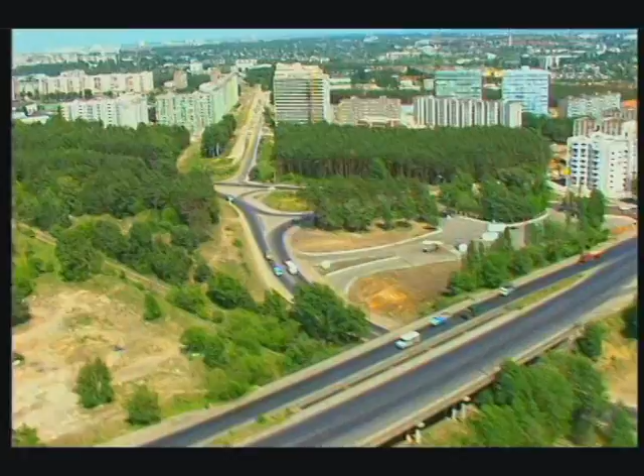Known since the epoch of Russian Tsar Peter the Great as a fortress and a cradle of the Russian Navy, the city is not only famous for its fighting past. It is fertile in scientific and educational resources, a very well-developed industry and modern infrastructure. A profitable location makes the city attractive for investors and business owners.

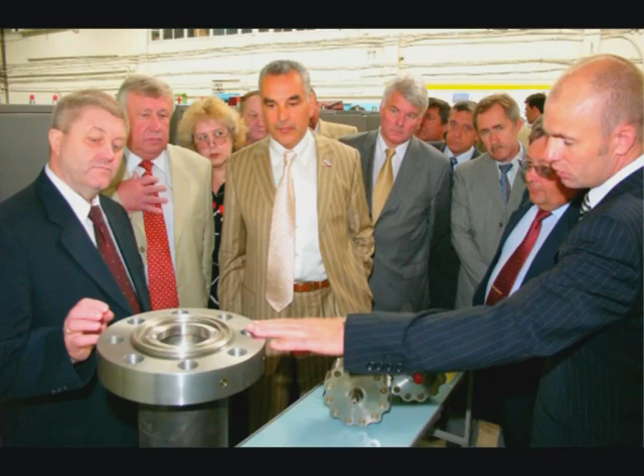A significant part of the city and the region's revenue comes from the financial and industrial company KOSMOS-NEFT-GAS. The company was founded in 1994 to meet the requirements of modern domestic origin equipment for fuel and energy enterprises. In the same year, KOSMOS-NEFT-GAS, together with Gazprom, concluded a general agreement on cooperation in the sphere of manufacturing high-performance equipment for exploration, production and transportation purposes.

In the year 2006, this arrangement was extended for another decade. The time period since the enterprise was originated is, from a historical point of view, not very long, but the company has deservedly advanced to the forefront in leadership.

During a 15-year period of working in the oil and gas market, KOSMOS-NEFT-GAS has established a reputation within the industry as being a reliable partner.

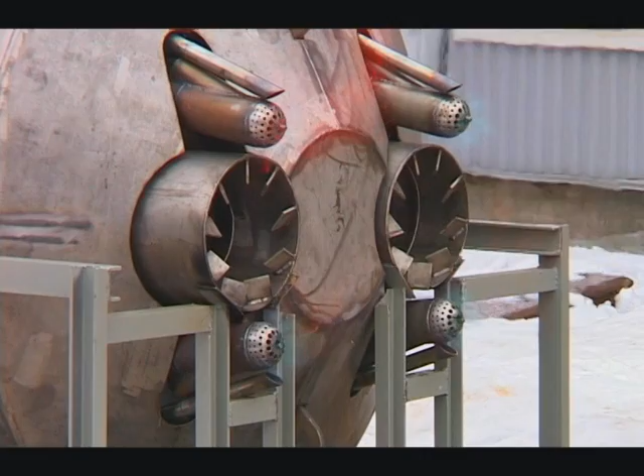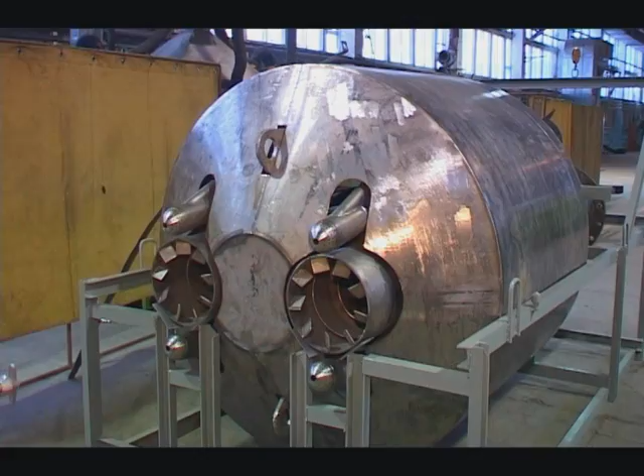Nowadays, we participate in all large-scale projects at the Barents Sea. We produce various equipment for the first Russian platform Prirazlomnaya and also bid for numerous offshore-related projects. They have already supplied a suite of flare equipment to the ice-resistant fixed offshore platform for the Prirazlomnaya field. The company has gained abundant experience in supplying smokeless flares and flare systems.

Together with Gazprom, we participate in the Far North development activity involving the fields of the Yamal Peninsula, and especially the Bovanenkovo field. We have developed a number of equipment types which do not have any analogues regarding their ability to operate in Far North conditions at temperature ratings down to -60 degrees Celsius. Moreover, we won several serial production tenders.

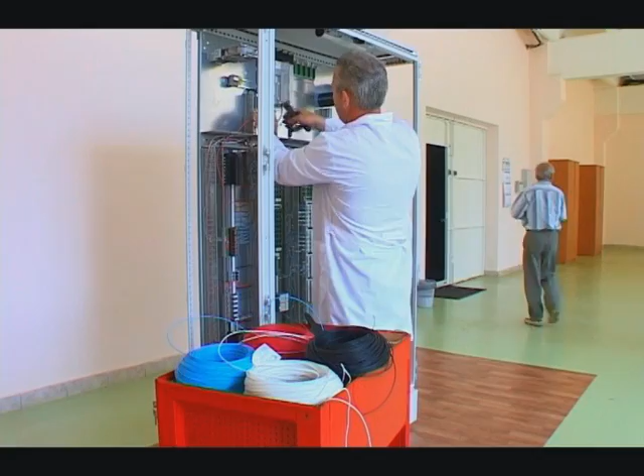Through years of work, the staff have embedded the optimal structure allowing maximum satisfaction of the customer's requirements. KOSMOS-NEFT-GAS now includes a scientific and engineering center, a production complex, a hydrocarbon processing research institute, and a service subdivision.

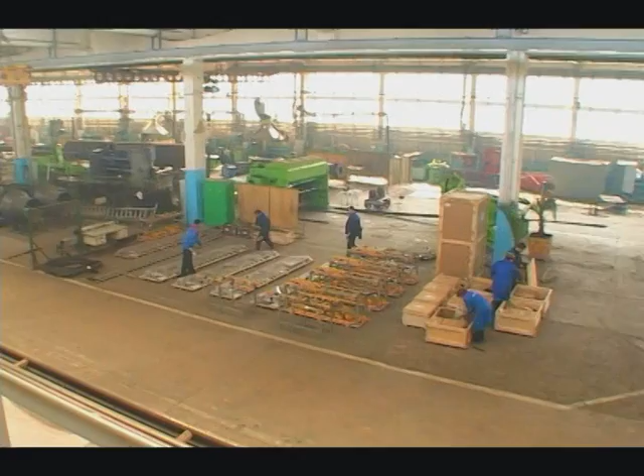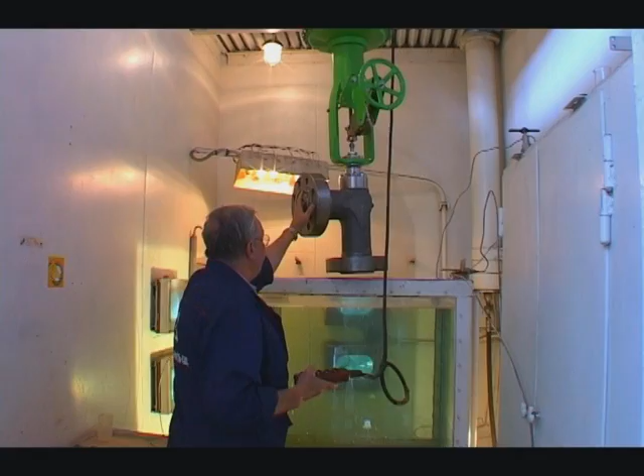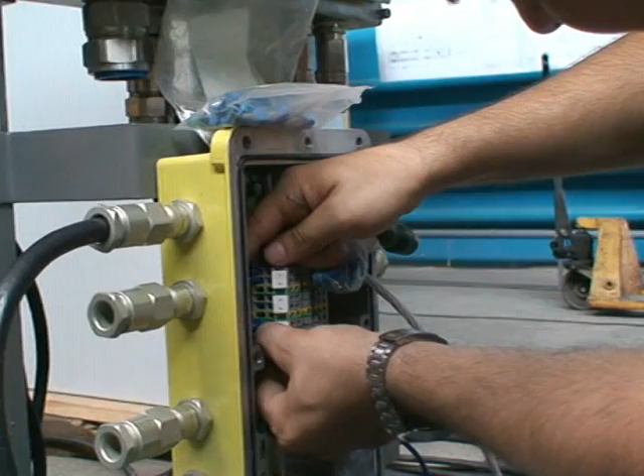A supporting member of this system is the production complex. Its manufacturing capabilities comprise a tool and die shop, all-type welding fabrication, machining and assembling shops, foundry, cooling chambers down to -60 degrees Celsius, furnaces for heat treatments over the range from 0 to 1,500 degrees, and various painting equipment. There is a test system which includes a laboratory and facilities to determine mechanical properties of a product and to assess its build quality.

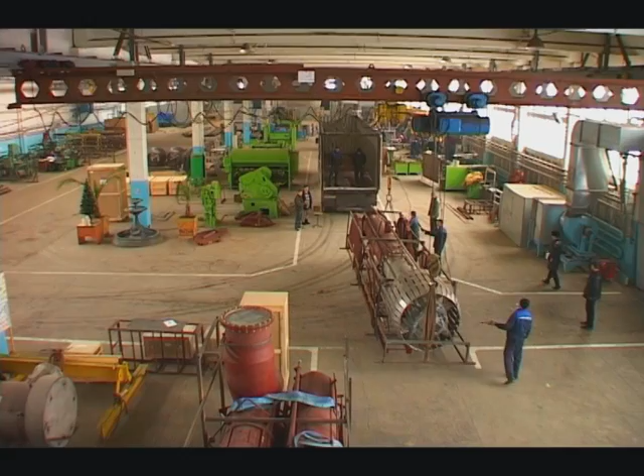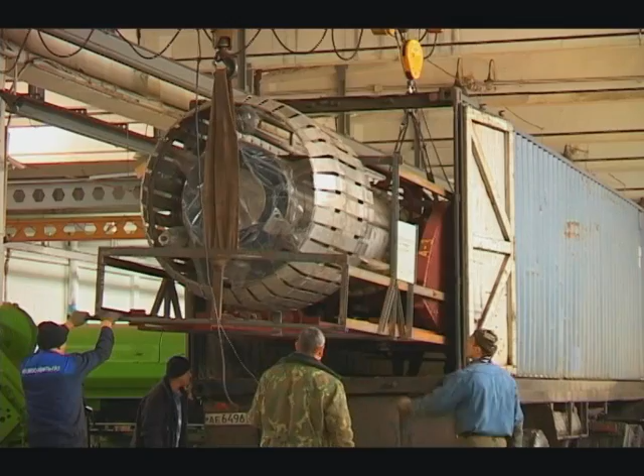The equipment produced by KOSMOS-NEFT-GAS meets requirements of the Russian state standard system, also known as GOST, and it is approved by the Federal Service for Supervision of Environment, Technology and Nuclear Management. The personnel possess all necessary skill degrees and appropriate qualification certificates, thus assuring a high level of order execution.

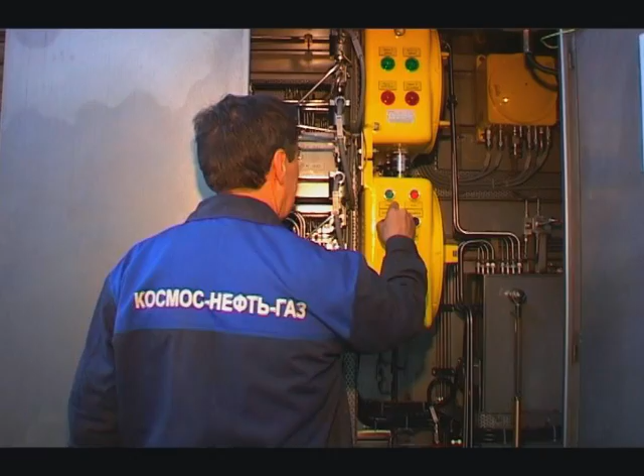The company's main policy stands for constant service range widening and increasing the level of personnel skills. General development of the company is impossible without these issues. For that very reason, all the employees attend specialized exhibitions in Russia and abroad. They participate in roundtable conferences and numerous seminars.

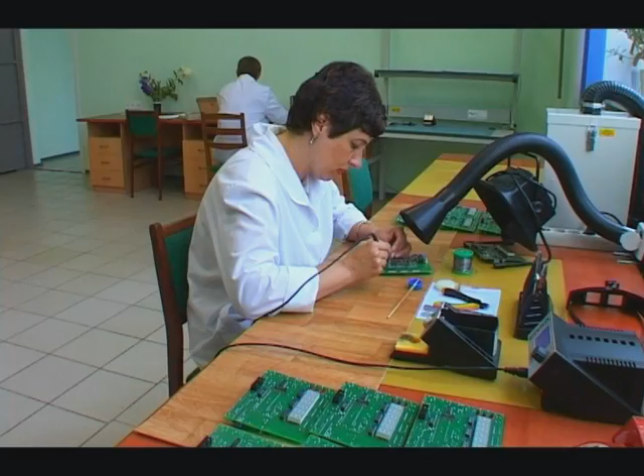A key element of KOSMOS-NEFT-GAS, which can be picturesquely said to be its brain, a core of engineering thought, is a scientific and engineering center. This subdivision carries out different research and development works for oil and gas industry enterprises. All equipment is developed in strict correspondence with customers' requirements.

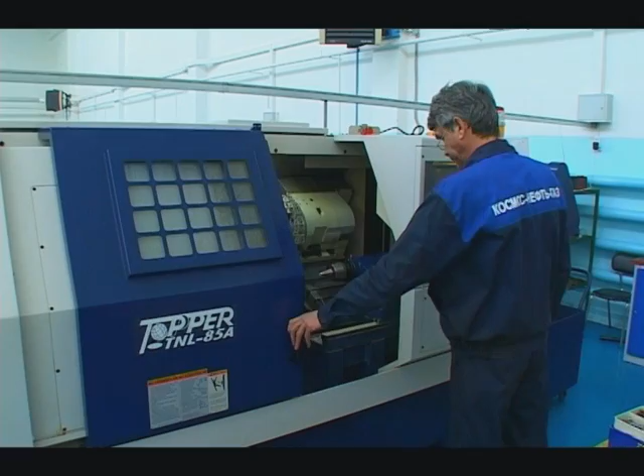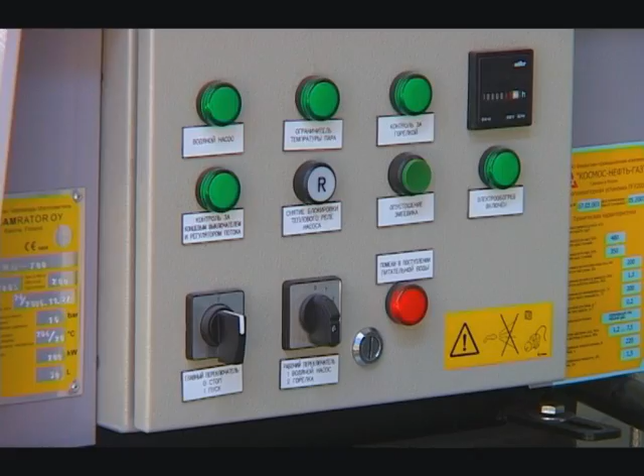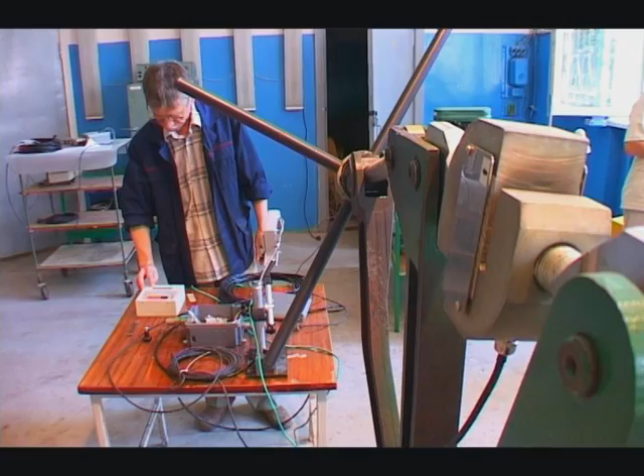The projects of the Scientific and Engineering Center are not always serial ones. Each of them is in its own way unique and based on state-of-the-art engineering decisions. They are developed to meet individual operation requirements for an appropriate field area, considering all process parameters. High performance level is achieved owing to numerous factors, such as thorough study of an original customer specification, discussion of all design stages at technical board meetings, and strict material selection. Here you will meet highly qualified and experienced specialists.

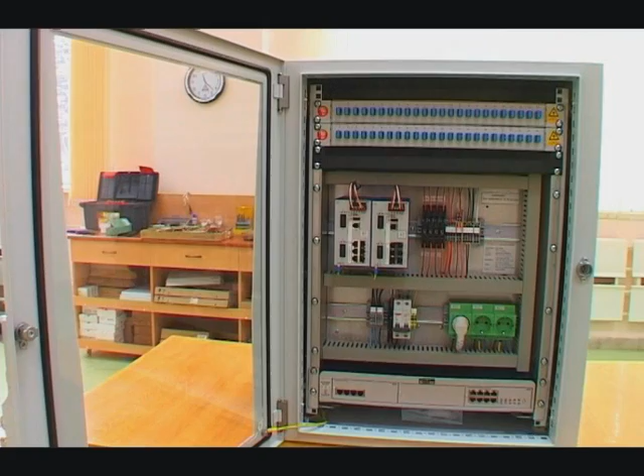Most of them possess advanced academic degrees and rich experience in creating field construction equipment. They introduce their own technical solutions in their products. A few score of inventions already accepted in production are patent protected in the Russian Federation.

They are award winners of different trade and international exhibitions. The experts of the Scientific and Engineering Center render their product supervision right up to its introduction into service.

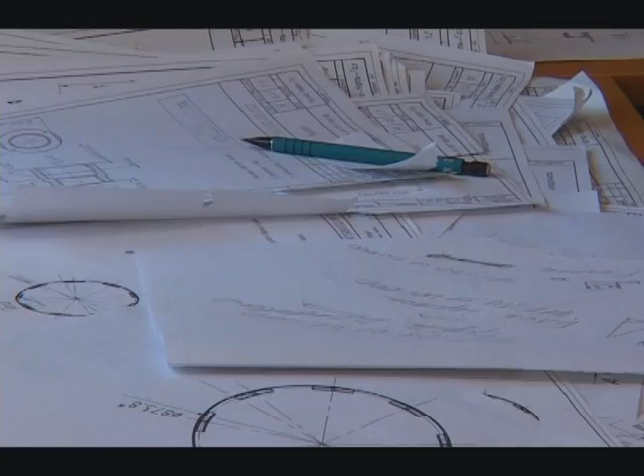Depending on a customer's request, the design can be changed, modified, and some ancillary equipment may be developed, non-stock equipment in particular. The staff of the company are very skilled at development of equipment to be used at gas condensate fields.

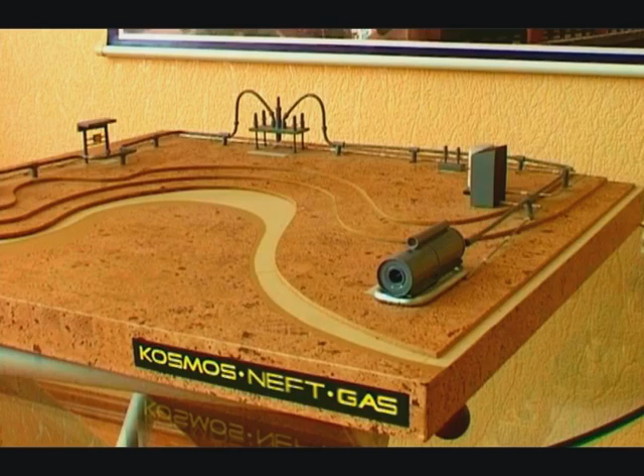For instance, for the facilities of the company Gazprom Dobycha Astrakhan. This field is estimated to be one of the most challenging in Russia and in the world over.

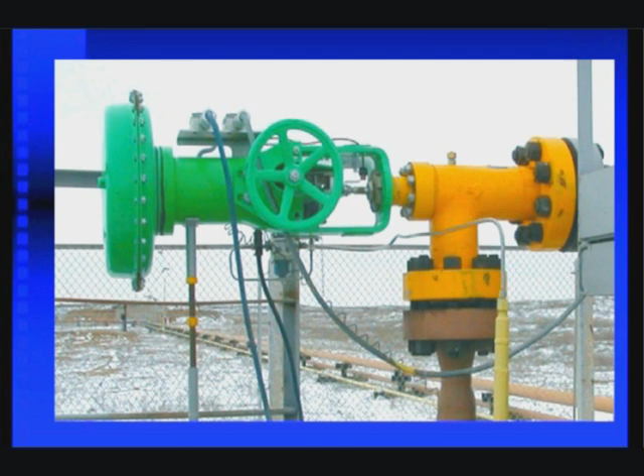The equipment produced for the Astrakhan gas condensate field has been calculated for long-term service, during which it was proved that Russian innovations are not inferior, but sometimes even superior to foreign analogues.

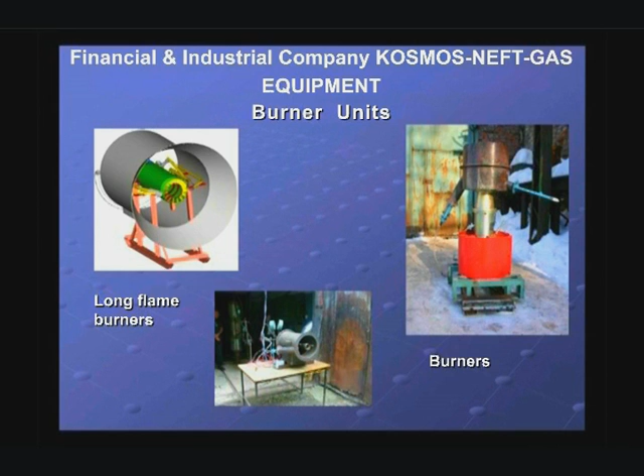The company takes on continuous development and reliable long-sided cooperation. Therefore, warranty service and follow-on support are always rendered on a high level, thus securing stable production, transportation, storage and processing of gas. A series of equipment for offshore platforms is really a high watermark.

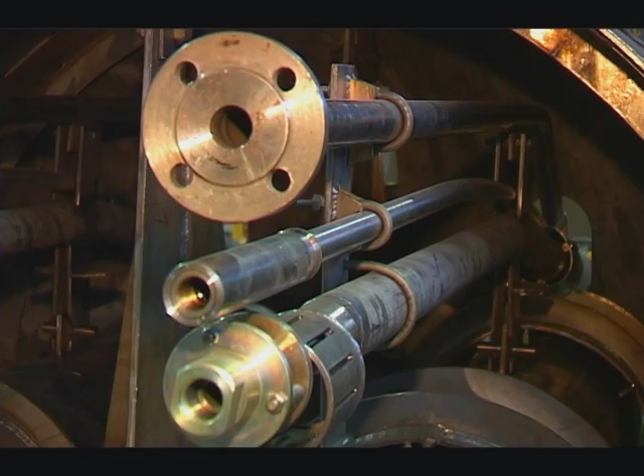One of them, a flare system, showed perfect testing results and has never been manufactured in Russia before. Such a rational approach to business making is far and away a general rule of KOSMOS-NEFT-GAS.

Success achieved through many years of development was not just a juncture of events. The experts of the holding devoted these years to close scrutiny of domestic and world practices. Many companies of global reputation became partners of KOSMOS-NEFT-GAS.

The company offers a whole range of services from a drawing board to turnkey projects. Since the very beginning of activity, the Hydrocarbon Processing Institute held their interest in complex projects maturing for Russian and foreign markets.

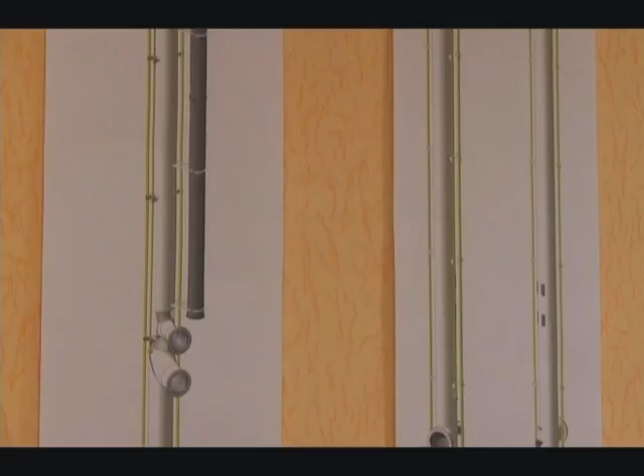This subdivision of the KOSMOS-NEFT-GAS holding, as well as the others, tends to build highly responsible and trusted relationships. Cooperation with the hydrocarbon processing project can start even before contracting.

The first step is compiling requirement specifications. As soon as the project is matured, all services necessary for maintenance of the newly started plant are delivered.

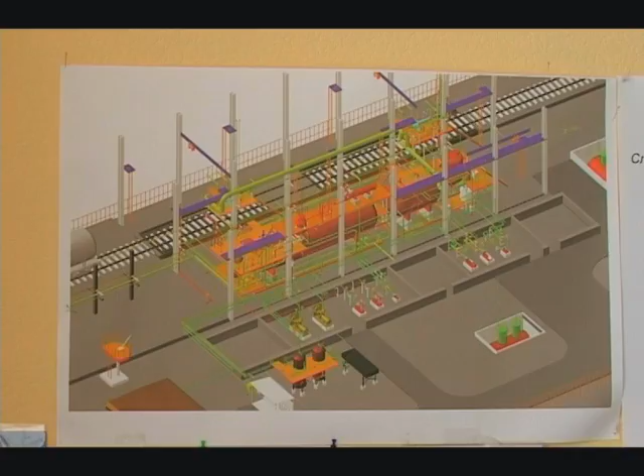With this institution, it is possible to fulfill the most complete scope of design works of any facility related to the chemical, petrochemical, petroleum refining industries and other types of industrial enterprises.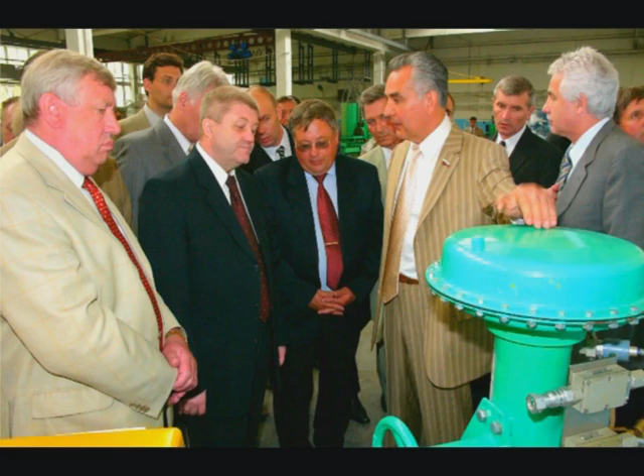There is no doubt that the hydrocarbon processing project would cope with any subject of industrial property in the oil and gas sphere. Reliable reputation, long-term agreements with benchmark companies of Russia and other countries, straight dealing and very high reliability. This is the financial and industrial company KOSMOS-NEFT-GAS.

The president, Mr. Ivan Lachugin, a person of considerable talent and energy, has rich working experience in the fuel and energy sphere. It is to a large extent due to his efforts that huge oil and gas companies got the opportunity of using stable, high-quality operating machinery.